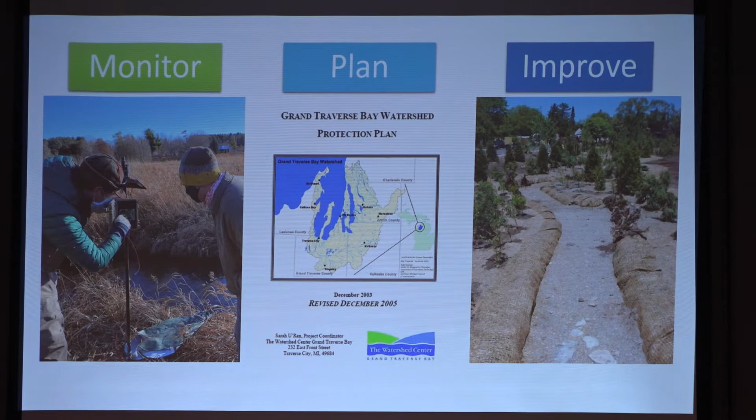We do monitoring work. In order for us to know what we need to do to help protect the bay, we need to know what our problems are. So we do a lot of stream monitoring. This is a picture of Kids Creek here in Traverse City, where we're looking for road salts that might be getting in, and we think chloride might be an issue. So we're doing some monitoring so that if it is an issue, we can try to fix it.

We plan, so we hold 3 watershed protection plans. Watershed protection plans, if you're not familiar, are state and federally approved plans that basically outline what your watershed looks like, what its threats are, and then you have a whole table full of stuff that you need to do in order to protect that watershed. I'll go into what our watershed is, but a lot of the work that we do is implementing the plans that we have for our various watersheds.

We do improvement projects. This is a picture also of Kids Creek over by Munson Medical Center, where a few years ago they wanted to build a cancer center, but there was an underground culverted creek in the way. So to build that cancer center, we helped them daylight the creek. This is before the water was flowing through that creek, but we do a lot of stream restoration projects and things like that.

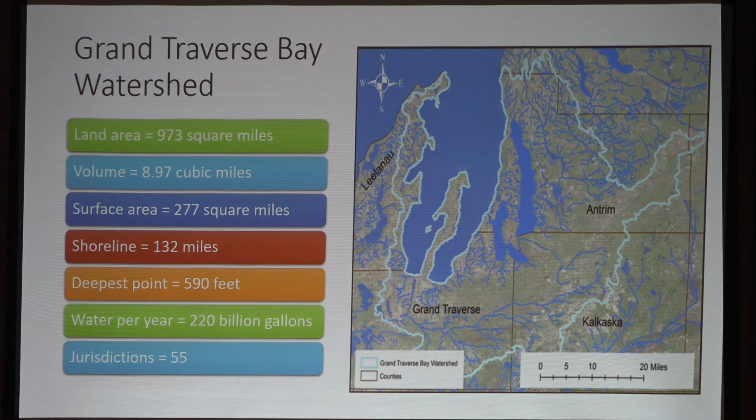So that's the Grand Traverse Bay watershed. What I'm going to talk about today is the Elk River Chain of Lakes. About 60% of the water that goes into Grand Traverse Bay comes from the chain of lakes.

If you're not familiar with this area, it's a super cool series of interconnected lakes and streams that covers about 500 square miles. There are 14 lakes and a bunch of streams that come into it, and it basically ends up outletting into the bay over by Elk Rapids.

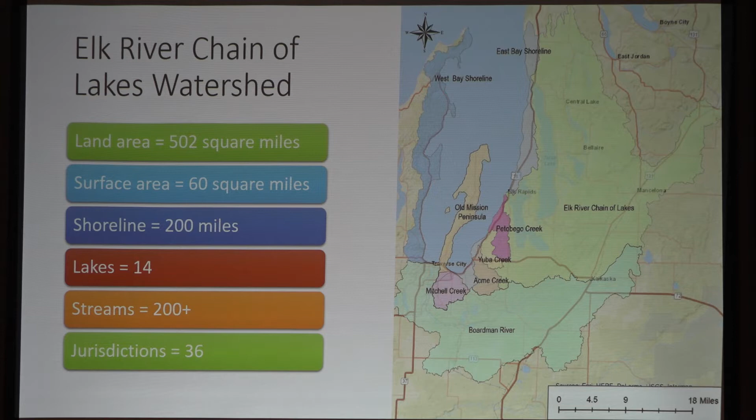So it's a fairly large watershed, and it covers 36 jurisdictions. A large number of those jurisdictions are covered there. So let's all get on the same page.

So if there's one aspect of your ecosystem that's affected, like loss of vegetation, it's going to have an effect on a lot of those other benefits as well. Recognizing that connectedness between an ecosystem and the watershed is super important when we're looking at the impacts of human-caused sources and things like that - there's sort of a trickling effect where it will spread out through that whole watershed.

So lots of familiar things: air quality, food and habitat for wildlife, recreation for folks, scenic beauty, cultural significance - a lot of things that make up a healthy watershed.

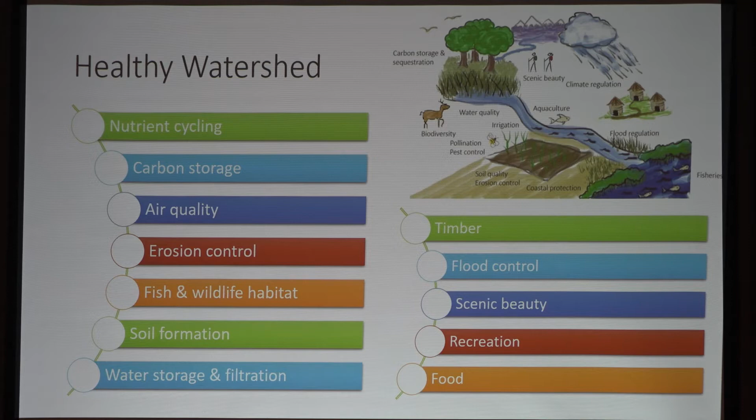Is shoreline hardening like putting in large parking structures, buildings, and those types of things where you harden up the shoreline? Or what is it?

When I'm talking about shoreline hardening, I mean most specifically a parcel that's on a water body that has something like a seawall, or big riprap without any plants, things like that - as opposed to a natural shoreline, which I'll talk about in a second. So that's just that sort of hardening of the land-water interface.

So a couple of reasons these threats are really important. One, we're going to talk about vegetation and tree canopy - there's a list of ecosystem services that those provide. If you look at the yellow here - my pointer still works.

If you look at this yellow, this is turf grass right here - that's how shallow the root system is on turf grass. If you look at some of the other native plants that come out to the left and right, you'll see those deep roots help hold your soil together. They help absorb nutrients and pollutants, and they also help these plants be more sustainable in the type of climate we have and withstand drought.

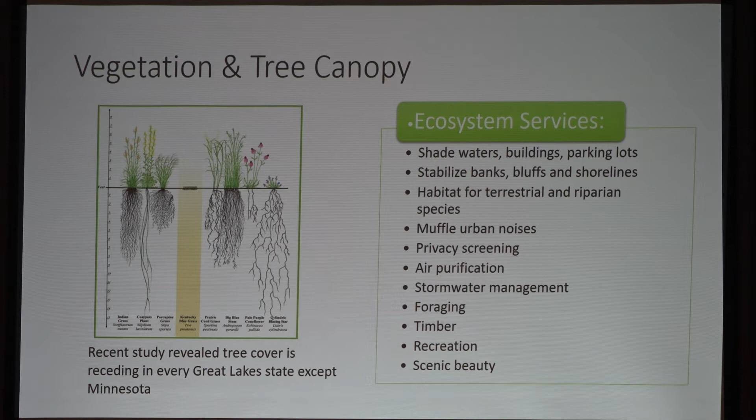So when we talk about the importance of vegetation, we really mean more than just turf grass - we're talking about leafy things or grasses that have large roots, because those are the ones that provide the most ecosystem services. And tree cover - I don't think it's a surprise to anybody that tree cover has been reducing and continues to be reduced, so that threat is still there.

Oh, look, this works now. Okay, I went the wrong way though.

When you harden that surface, you significantly change that land-water interface. You are taking the energy that comes from the lake and pushing it down into the ground, so you will get scouring, and you'll have very little habitat there.

If you have a hardened shoreline that is not hardened on either side, you'll get scouring around those sides. So often what you'll see is one person on a lake will put in a seawall, and then the next person will put in a seawall because that has now been redirected towards them, and then it moves itself out.

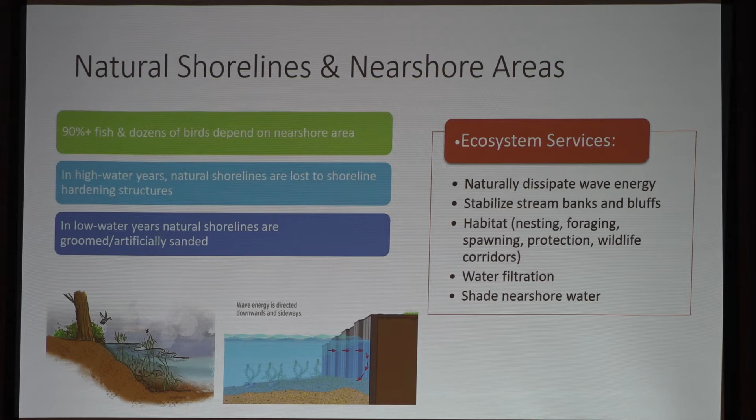Recognizing that, Great Lakes water levels rise and fall naturally, and lately they've been doing it in more extreme levels. So when we have high water level years, everybody wants to harden the shorelines to help protect the infrastructure that is landward. And when we have low water years, everybody likes to groom the beaches so there aren't any of those pesky plants in the way. So either way, we're really changing what that area between the land and the water looks like, which is having a huge impact on our ecosystem.

Wetlands are amazing. They're one of the most productive places that we have on Earth. They have every ecosystem benefit you could possibly think of. They harbor so many animals and plants and fish and those sorts of things. But wetlands are one of the things that have been most significantly reduced. In Grand Traverse Bay in particular, over 50% of our pre-development wetlands have now disappeared.

Most of that is due to fragmenting those wetlands along the shoreline, mostly from development. Even a small fill of a wetland is death by 1,000 cuts — you do it here and there, and all of a sudden the wetland itself is changed. It no longer connects, it doesn't function the way it's supposed to, and you lose all of those ecosystem services. So wetland loss is definitely one of the biggest threats we have in the Great Lakes area.

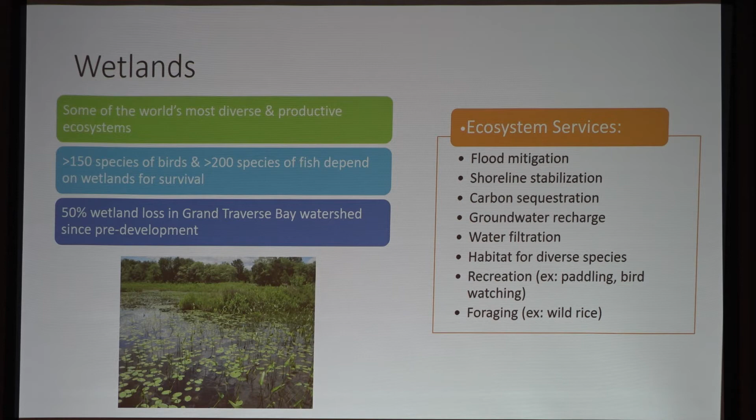Stormwater — great day to talk about stormwater. If anybody's been outside, you can watch this stuff. I watched a couple swirling tornadoes down some storm drains too. This has been an issue in Traverse City in particular the last few years as we get more intense, more frequent rainfalls.

So the more we harden our surfaces, the less the water is able to infiltrate into the ground. Particularly in urban areas, you have lots of impervious surfaces, and that's all directed to some sort of stormwater system. Those stormwater systems were made 80 years ago and are undersized and under-maintained, so we tend to get a lot of flooding.

So the more impervious surfaces we have, the more stormwater issues we have. The more stormwater we have, the more likely that stormwater is going to pick up pollutants and trash on the road. In our watershed, not all the stormwater systems outlet directly to another water body, whether it's a lake or river that eventually gets out into the bay, or directly into the bay. That direct connection is basically taking everything falling on that land and channeling it and shooting it out of a pipe.

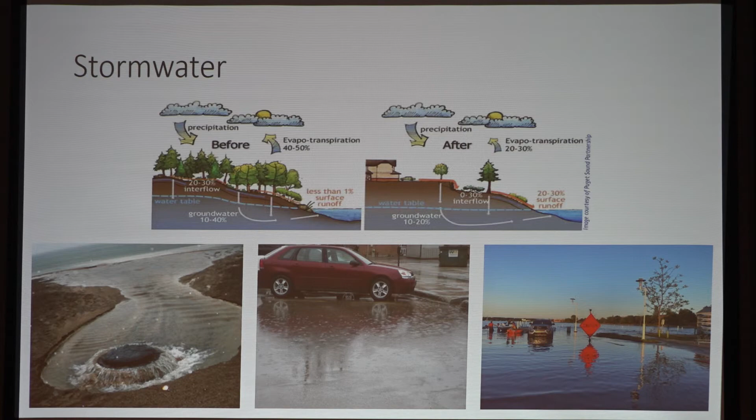I mentioned the watershed plans that we have. The Elk River Chain of Lakes has a watershed protection plan right now — it's sitting with the state for approval, but we're still implementing it. We call it ERCOL. The ERCOL watershed is one of the most pristine watersheds, definitely in our area, but most likely in our region, with lots of economic and recreational benefits.

The difference between the streams, lakes, and wetlands they have is really diverse. But human-driven actions really threaten to impair these. The top 5 threats in the Chain of Lakes are lakeshore development — building right up next to the shore, hardening your shoreline, having a lawn directly down to the shoreline — and impervious surface and stormwater runoff.

Invasive species, both aquatic and terrestrial — things in the water like zebra mussels, or things on the land like Phragmites. There are lots of different types of invasive species. And road stream crossings, which is where a road goes over a stream.

There's any number of issues with those. You can have undersized culverts so that there's no passage for fish to get through. There's generally a lot of erosion happening on the sides of road stream crossings, so a lot of sediment getting into the area. In the Chain of Lakes in particular, one of the largest impairments is sediment. It's already a sediment-driven system, but getting a lot of sediment from road stream crossings is one of the reasons why there's impairments on that watershed.

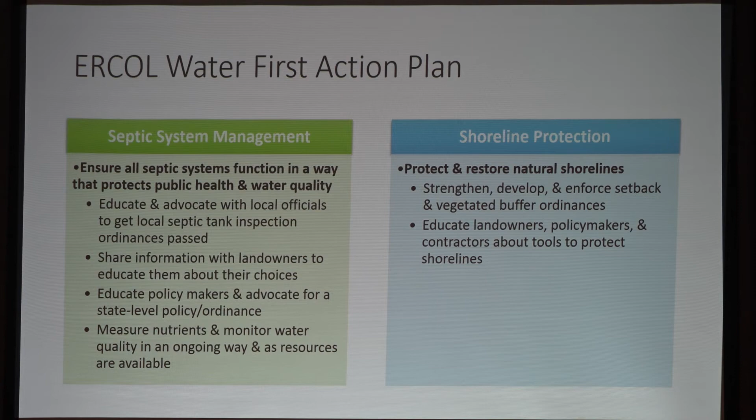In terms of shoreline protection, there's really two main things. One is always education, educating our landowners on best practices, things you should and should not do. And the other is looking at our local policies and ordinances, asking do we have protective measures in place? Do we have riparian buffers, requiring plants to be planted on the nearshore area? Do we have water's edge setbacks, requiring buildings to be set back 50 feet from the water, to allow natural shoreline processes and prevent higher water levels from flooding your property? Do we have those things in place?

Here's where we sit with these things right now. For septic system management, there's been some brochures developed, and a survey was done. Milton Township in Antrim County has a time of transfer ordinance, and they've had it for about a decade. They asked the property owners who went through that process whether it was valuable to them, what they thought about it, and whether there were barriers. Basically what they found is most folks were appreciative of this.

So they found some things. Before you buy your house, you have to have your septic system inspected. For potential buyers, there were some things that needed to be fixed before they actually bought the home, and they were appreciative that those issues were found. We didn't ask the other way around, people who sold the house, what that was like from their perspective. Recognizing this is just a small point in time, and it's not solving all the problems, but it is one of the tools we have. Knowing that folks who went through that process thought it was a decent process, understood why, and appreciated it was helpful.

And now there's a presentation that's been put together that folks are taking around to some of the local jurisdictions. One part covers what the problem is and what we're dealing with, and the other covers some of the potential solutions. Again, there is no silver bullet, in my opinion, that's the right answer to solve septic system issues. But there are at least a dozen tools we have, and just implementing one of those is going to get us farther than we are now.

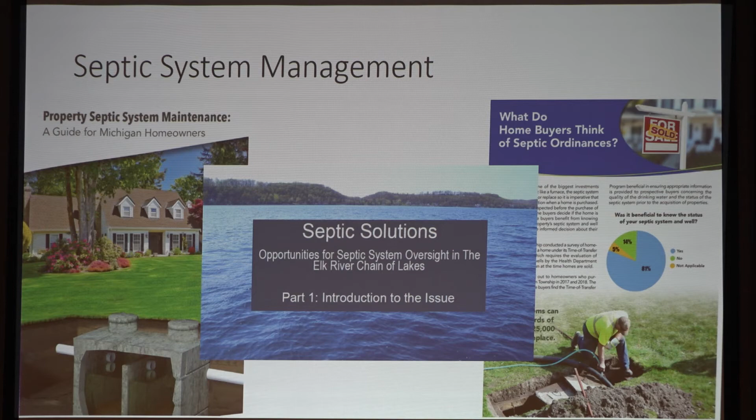In terms of the shoreline protection group, from the education perspective, there's a riparian handbook that the Elk-Skegemog Lakes Association has given to all of their riparian property owners for 20 years. We want to look at expanding this so all lake associations have it, so we're going to update it. It's interesting to look back on a 20-year-old document and see what we thought was important then versus now, recognizing there are huge sections missing because they weren't issues 20 years ago.

So to be able to update that and have an actual handbook that's consistent—if you buy a house on 6 Mile Lake, you're getting the same handbook as if you buy a house on Torch Lake. That messaging is consistent, and the more people hear it, the more likely they might act on it. Another aspect of this is...

we chose about 5 priority communities in the chain of lakes, and we sat down with their staff and elected officials and said, hey, what are you guys doing for water quality? Do you have barriers, or what are you interested in doing? What other issues are you dealing with as a small rural community? Here are some resources we have that might help. Would you be interested in a time of transfer ordinance? So we had this conversation about what these small communities are dealing with from an environmental perspective, and here are the tools we have to maybe help with that.

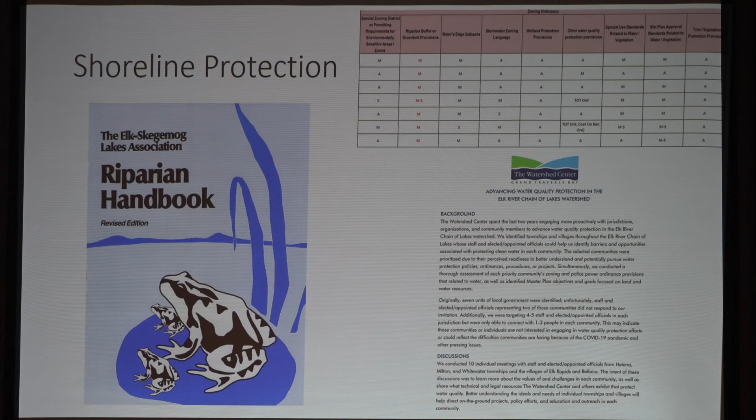I don't want to get into the details, but two things we found interesting: there seemed to be general categories of things that everybody had or nobody had, and then kind of a smattering. Each of those five communities we looked at did have a riparian buffer ordinance of some sort, but nobody had a tree protection ordinance. So we've identified places that we need to strengthen, since everybody has one but they may not all be great, and we've identified huge gaps. Now we can start trying to address those and go into those communities and talk about that.

So I'm going to shift and talk about our work in particular and some of the stormwater efforts that we have.

Sediments and nutrients are the biggest threats to Grand Traverse Bay watershed, which is why a lot of our on-the-ground efforts focus on the stormwater aspect. We're trying to keep stormwater, pollutants, and the associated nutrients out of the bay. So when we talk about reduction, that's what I mean—basically trying to keep it out of the watershed.

We've done several projects, and a lot of these are also involved in local beach monitoring. So every Wednesday in the summer, we have folks go out and check for E. coli levels, because by checking for E. coli levels, we know if there's harmful bacteria that might affect beachgoers.

So there's that whole beach closing system—everybody's seen it. We do that program here, and the monitoring work we do has actually facilitated a lot of the stormwater work we've been able to do.

In Northport, Suttons Bay, and Bryant Park, those were all areas where E. coli levels were high for a significant amount of time over a few years. So we knew there were stormwater outlets there—all public beaches are where stormwater outlets are, because that's the public place you can have them.

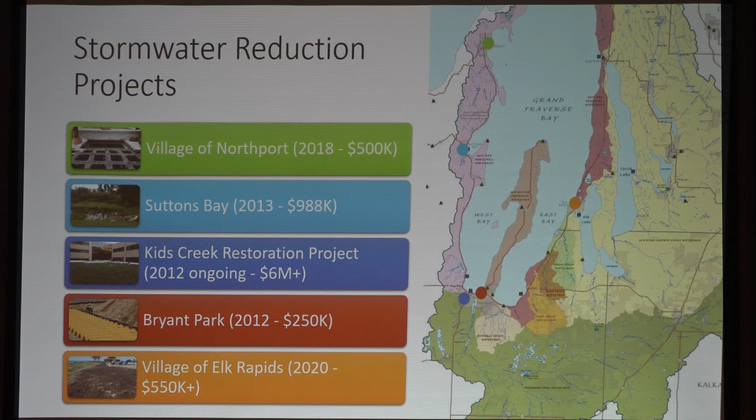Specifically, I'm going to talk about the one we're doing right now in the village of Elk Rapids. We are using green infrastructure techniques—green infrastructure basically mimics what nature would do. You're trying to channel stormwater into a certain area, get it to slow down, and infiltrate into the soil.

There's a lot of what I'll call gray infrastructure that tries to treat stormwater, but there's nothing better than soil to actually treat it. It removes the largest numbers of pollutants, nutrients, oils, greases, and bacteria, where you'd otherwise need super expensive filters and other gray infrastructure to do that. So anytime we're able to take stormwater and have it infiltrate into the ground, that's the biggest benefit we can find.

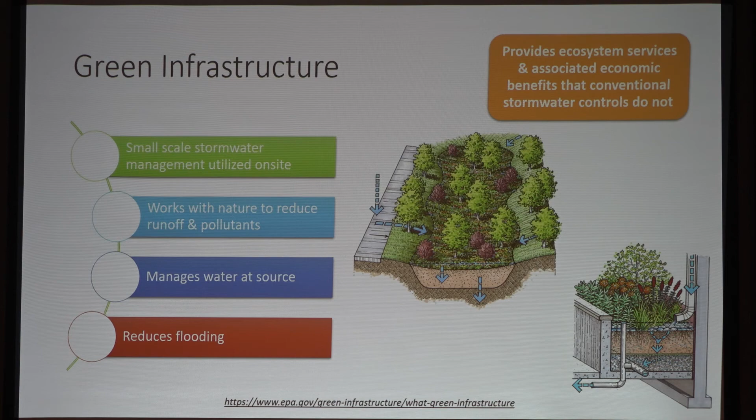There are two ways that we did this in Elk Rapids. One is through rain gardens—basically just a shallow depression that has a lot of plants in it, where you're actively directing your stormwater to that rain garden.

The picture here is one of the things we did in Suttons Bay—we put in 18 rain gardens, roadside rain gardens. Several of those took out what would be a parking spot. So if you think about a street, every 10 parking spots there's a rain garden. You curb it off and direct your stormwater into that rain garden, and the water just fills up.

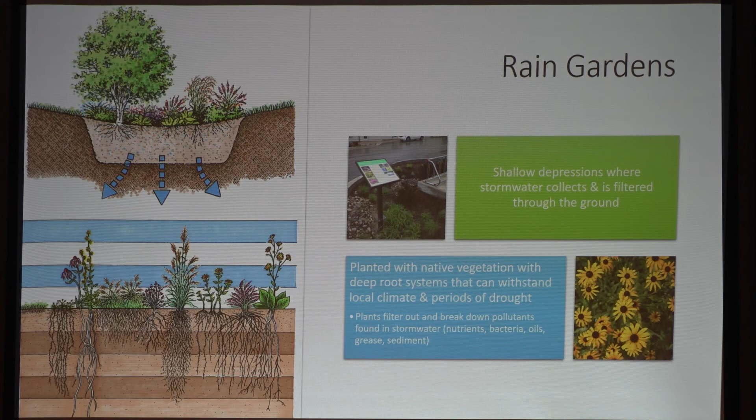It helps reduce flooding. It acts as storage, so more stormwater can go in there, and it slows down and infiltrates over time, versus that water directly running into your stormwater system and gushing out at the end of the pipe. They're all planted with native vegetation, making sure you have deep-rooted plants that are local and used to the climate conditions that you have.

The other thing we did was install infiltration trenches. These are huge, like you can stand inside of them, but they basically go underground. As the water goes into your catch basin, it gets slowed down and the sediment gets filtered out, and then it goes into these giant perforated pipes that have soil on the bottom, allowing the water to go into these pipes. They generally flow one to the other; you line them up and the water flows. The more water you get, the more pipes get filled up, but it also has that huge space to act as storage capacity. You don't see these, they're usually under streets. You don't even know that they're there, but you're taking that water that would go into the stormwater system normally, putting it underground and letting it infiltrate into the soil.

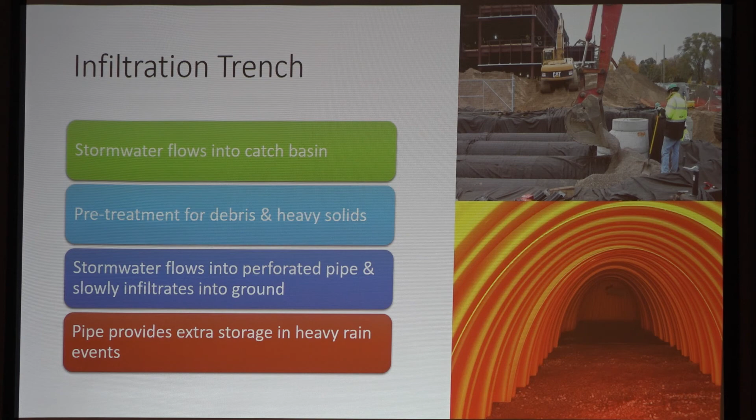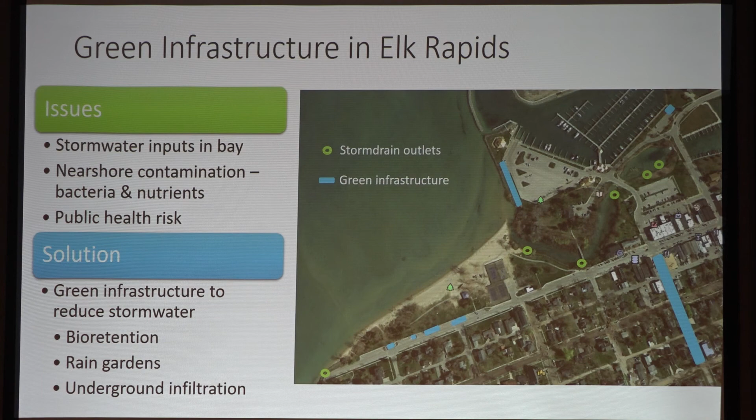So the work that we've done, the issues that we had, same thing we talked about: stormwater inputs in the bay, contaminants coming into the water. Right here is their public beach, and you can see this is the Elk River that comes out. You can see all their stormwater outlets that go into the river, and then there's a stormwater outlet right here. So folks sitting here along this beach are getting everything that's coming out from all of their stormwater outlets every time that it rains.

So we did a couple of projects. One was at the marina. This before picture, this is just a big grassy area. It was flooded all of the time. There were curb cuts to try to allow the water to get in there, but the grass was filling them in, so there's flooding all the time. The people who mowed the lawn just stopped mowing it for a while because it was too wet. Just this big nasty area, and we didn't have to do much to turn it into basically a bioswale. We took that entire section, excavated it out, put some good soil in there, threw in a bunch of plants, and we're good.

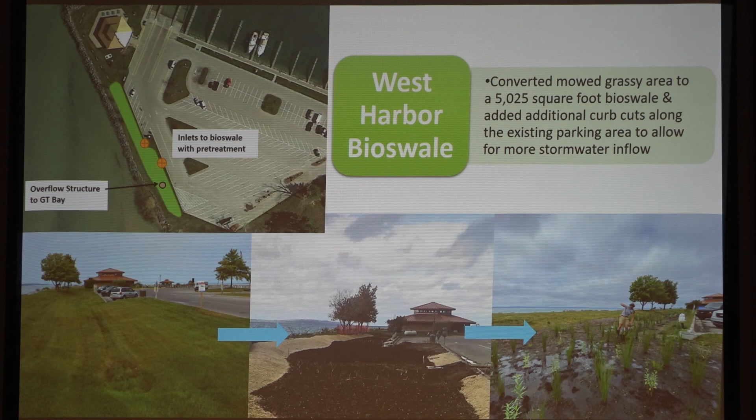The thing about this area is you can see how close it is to the water. Right now we have a really high water table. This entire marina complex is fill, so it's not natural, so there's some issues at this site. We're getting flooding a little bit more than we would like to. We just installed this last fall, so we have yet to see the plants really grow in and establish, and the water level is now going down, so we hope that this is going to do a lot better.

In another section of the marina, it was just a pretty little landscaped area at the edge of this whole parking area, and we turned it into a rain garden. There is pre-treatment before it goes in, basically getting out all of the sediments and things before it goes into the rain garden. So all of the stormwater that comes off of that parking lot is now directed into that rain garden. Plants and stuff here are pretty little. There's an overflow structure that goes right out into the water.

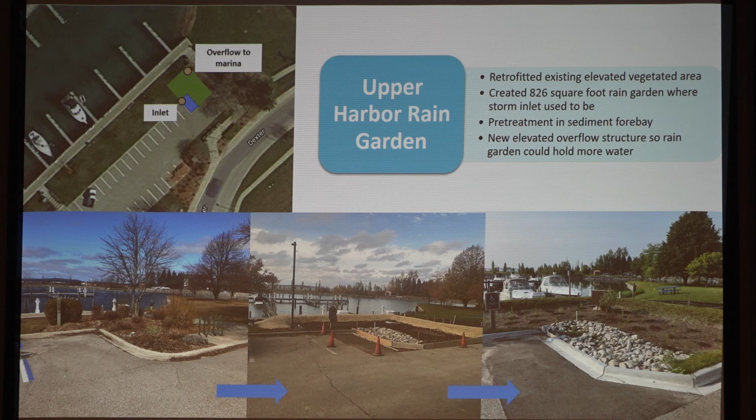One of the super cool things about this that I'm really excited about, we're doing a monitoring project here. We're looking at what is in the stormwater before it enters the rain garden, and then what's in the stormwater after it infiltrates. So we can look at what our phosphorus levels are, what our nitrogen levels are, how many suspended solids we have, and then after it's infiltrated and goes into the outlet, what are the same things. We can actually measure, instead of estimating or assuming, what this is going to be.

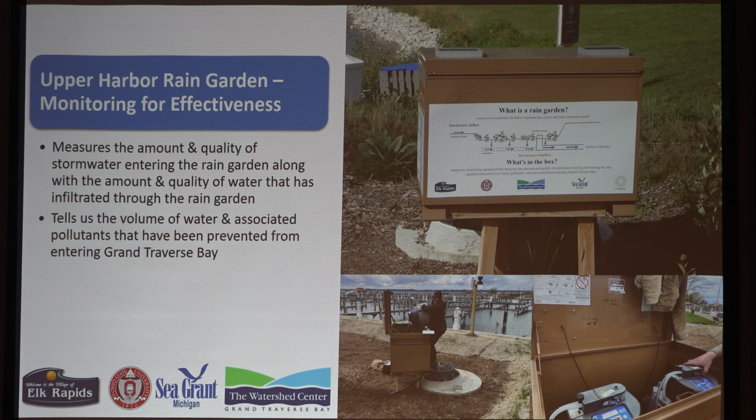And I checked these samples. There's two of these things: this one collects inlet water, and this one collects outlet water. Just holding them up, there's so much sediment and stuff that you can see in the one before it comes into the rain garden. The one coming out looks a lot cleaner. So I'm super excited we did this. Last year we took a few samples, and this year we'll do some more. I'm really excited to see, to prove that rain gardens really work, and at this site in particular, how much they're removing from each type of pollutant that would be going in.

We did some more rain gardens along River Street, the main street downtown that runs parallel to the beach I mentioned. These were nice little landscaped grassy islands. Nothing wrong with them, but we wanted to make them function to help reduce stormwater as well.

So we took each one of those spots, excavated out, and planted a bunch of plants. These larger trees were transplanted closer to the river, so the village was able to take those larger trees and transplant them. The smaller ones were taken by the company doing the project to be used for other landscaping.

So we were able to save all of the plants and things that were in there, except for large trees we had that were dead or invasive, which the village wanted to get rid of anyway. Some weren't even part of our project, but since we were already cutting trees down, we got an economy of scale and helped them with those too.

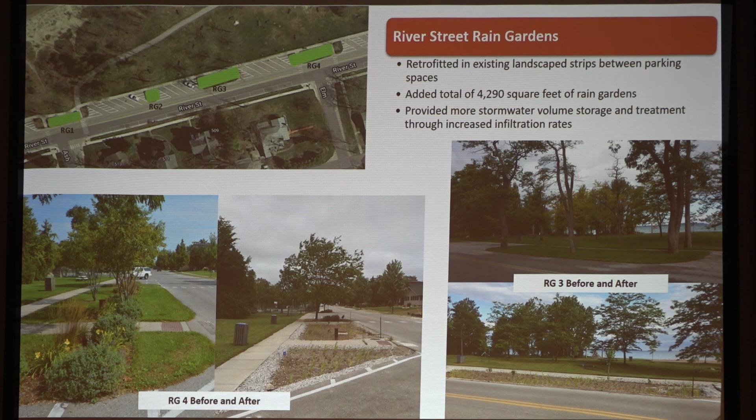So we had a lot of folks who were wary about us getting rid of their pretty looking plants and making it look kind of like this. But plants grow over time, and they'll come in next year, and in three years you won't even be able to tell that we did a project there.

Lots of stormwater stuff that we did there, I'll skip that. The last one is a project we're working on right now. The Cedar Street storm drain carries 80% of all the stormwater in Elk Rapids through that storm drain system.

We're going to be able to treat all of it through the projects we're doing. One is an infiltration trench, the big orange thing we talked about. Since the village is tearing up their street and replacing everything underneath it anyway, we're going to put an infiltration trench in under there, so the timing worked out really well.

Then as you go up the pipe, at some of the intersections and places with public or private property where folks are willing, we're going to install either rain gardens or rock gardens, which are the same thing, just without plants. They function the same way, they just don't have plants that take up the material.

One of the things we learn working in different communities on these stormwater projects is that each community really needs to decide what's right for them. Traverse City in particular does not want anything with green leaves on it. They don't want to maintain green leafy things. They'd much rather put in an infiltration trench where they can use their vac truck, already out there doing the catch basins, to service the infiltration trench at the same time.

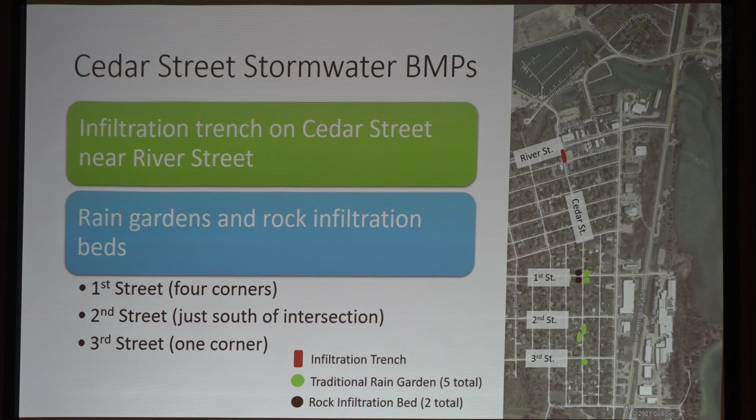In the rock infiltration beds, are you putting in a specific catch basin that they can come service, so they use vacuum trucks to come clean the sediment out that it traps before it goes out? Or are you just using a geotextile base underneath the rock to slow it down and allow it to permeate into the soil? So we would do the same thing like...